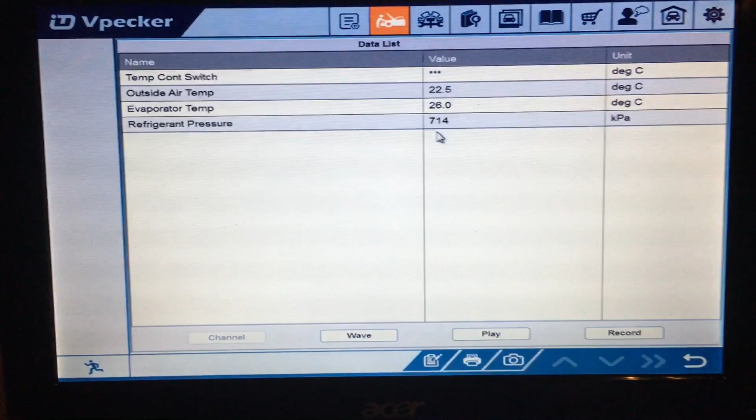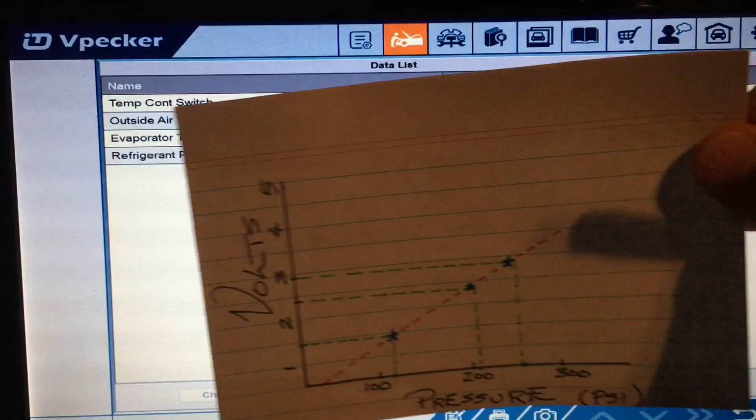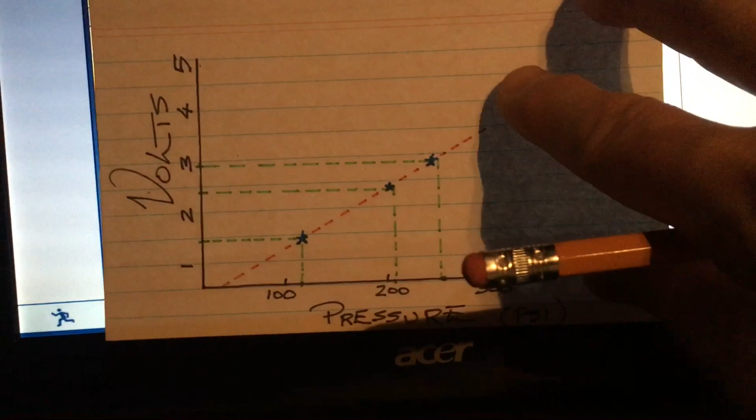To the last air conditioning video I did on the SX4, I was talking about how you could measure the DC voltage from the refrigerant pressure transducer, convert it, and get some idea of the pressure in the system. It didn't come to mind until today that I should have proved this out, that I wasn't just talking rubbish and it did actually make some sense.

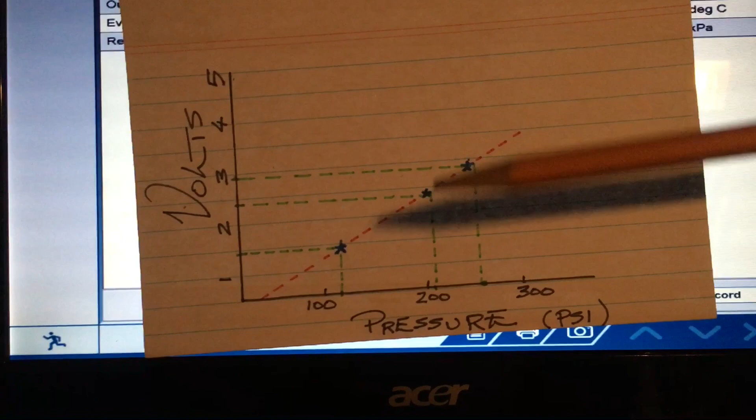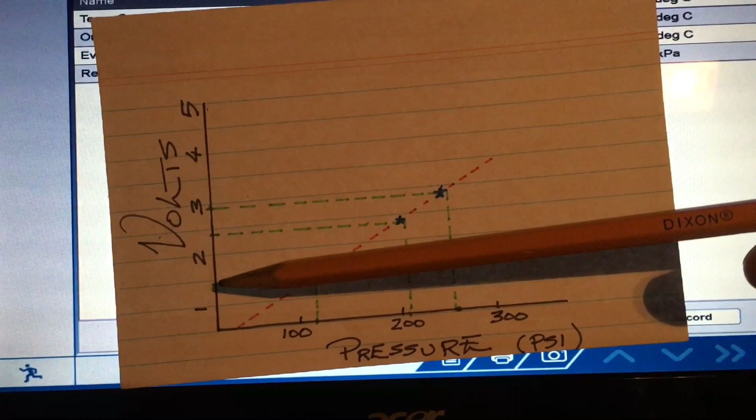So if you recall, we discussed this little card here, but we didn't know the actual pressures, we only had a voltage, which I believe was 1.37 volts. We talked about it being somewhere in and around this range on the graph, so in and around 100 PSI.

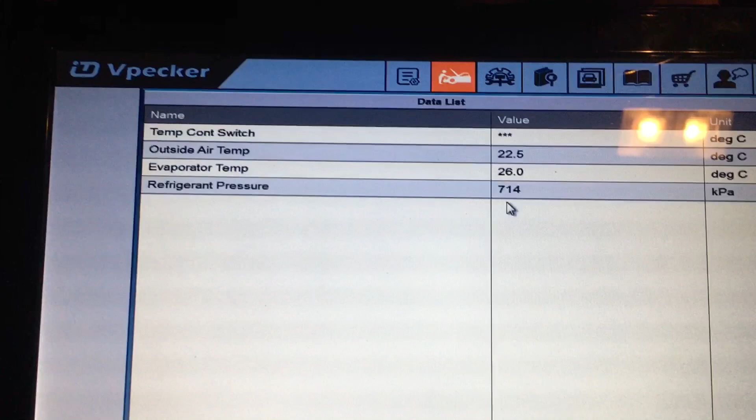Well, I'm in my car now. It's sitting statically, it has not been running, so of course the pressure is balanced on the high and low side. And there's the pressure, 700. I've got the Vpecker hooked up to it, so I'm going through the climate control module, or actually the engine control module that monitors this parameter. But in any case, you can see the pressure, 714 kilopascals.

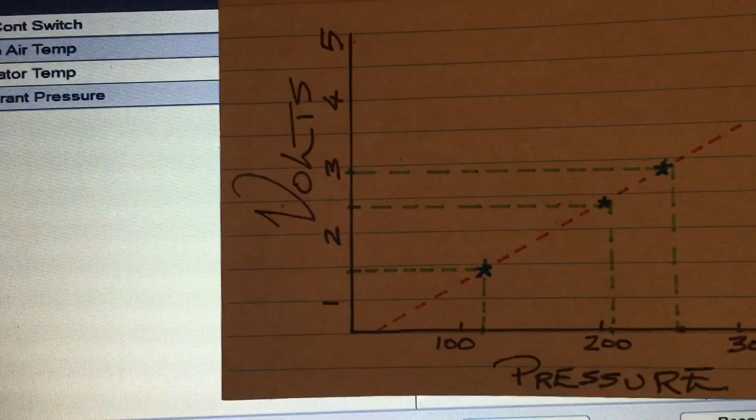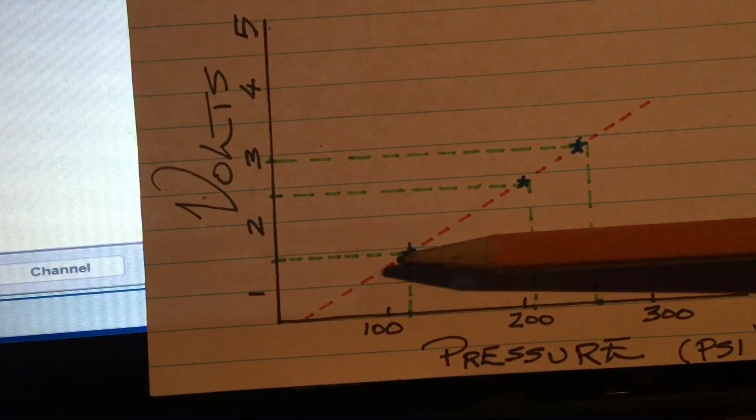Well, I can't show you because I'm using my phone at the moment, but I just googled it. That's 103 psi, pretty damn close to what we actually figured it was, right? So 1.39 volts, let's call it 1.4 volts for simplicity, where it comes across and intersects is pretty damn close to the little graph there.

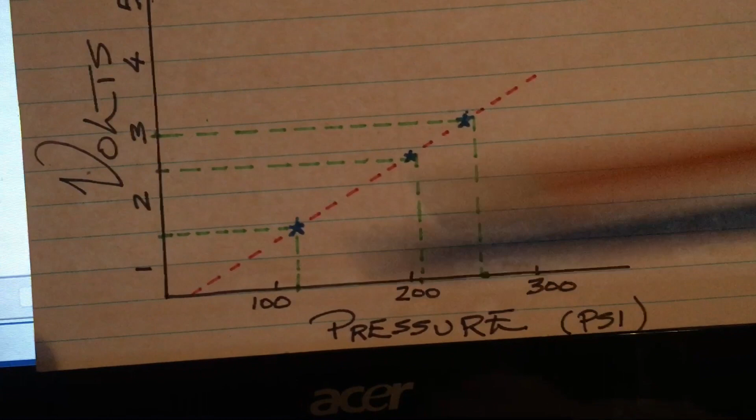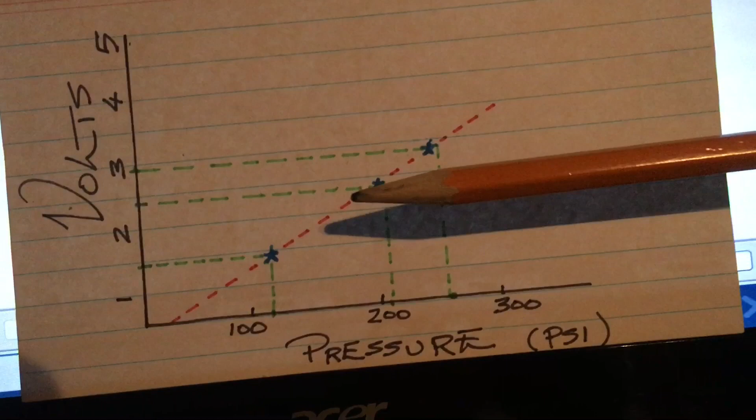So what we'll do is start the vehicle, and if you recall, it went up to very, very close to 2 volts. So there's 2 volts, and it intersects in and around 180 psi-ish, plus or minus a bit. Let's start the vehicle and see what the pressure actually goes to.

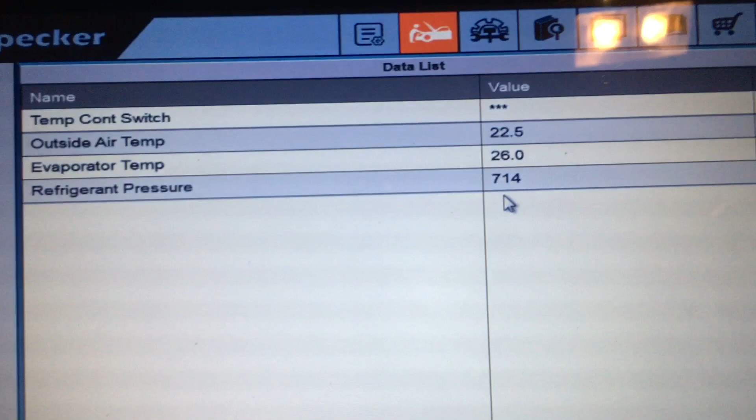Now of course we're going to have to do the conversion again, so I'll interrupt the video momentarily, do the conversion, and restart. Let's take a look, we'll start the car, put the air conditioning on, and the refrigerant pressure should take a jump.

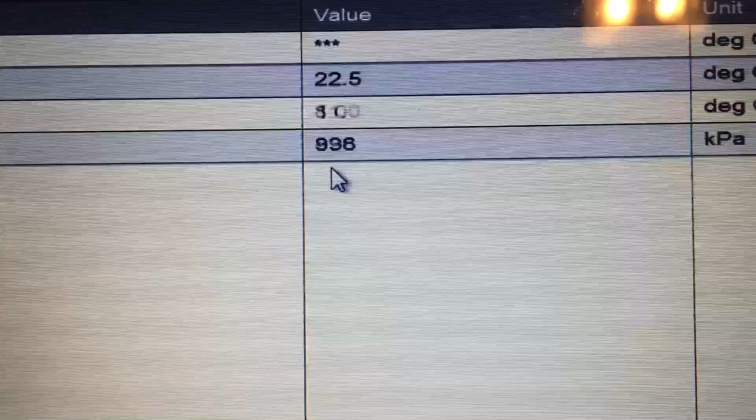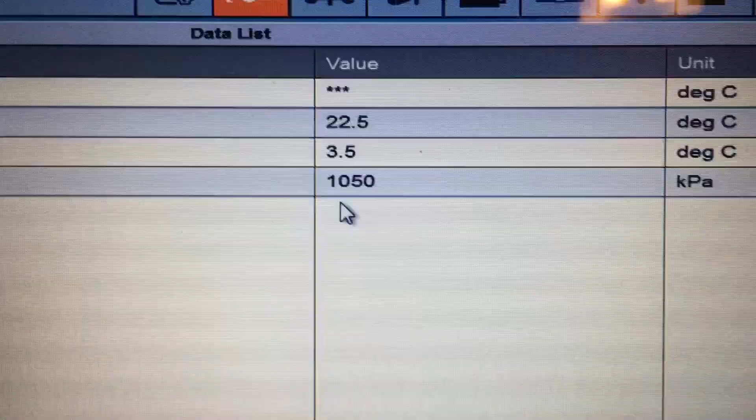Keep in mind our outside temperature, as you can see, 22.5 there, boys. That seems a bit low, it seems a bit warmer than that outside to me, but it's a bit cooler than yesterday. Anyway, it's close enough, within a few degrees. We'll see if we can get the point here. Let's let it run for a couple of minutes and see what our value actually is.

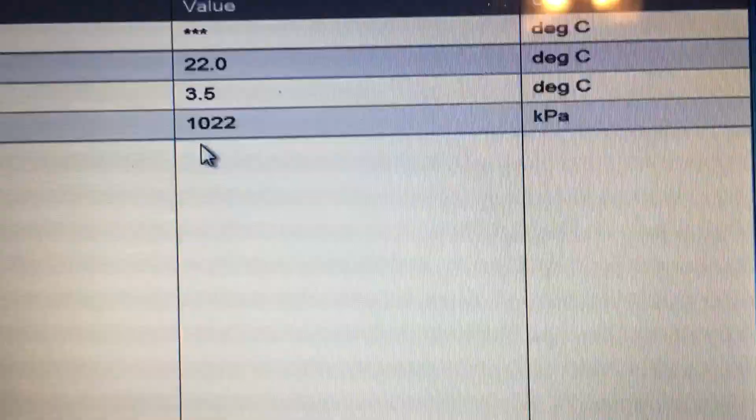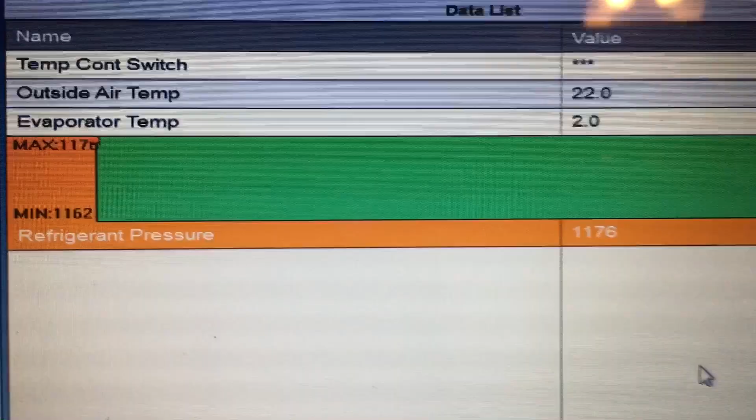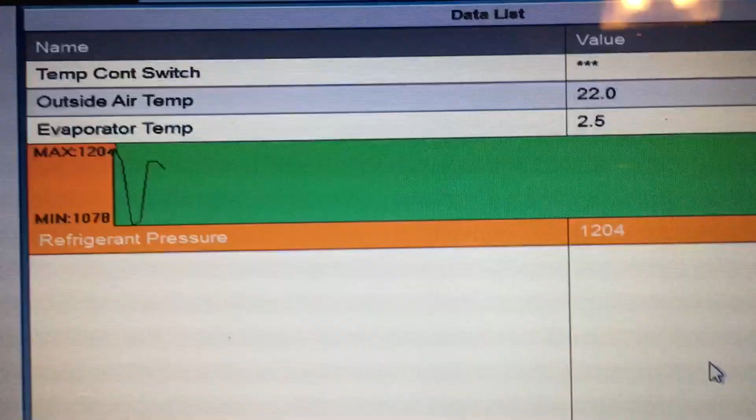You can see our evaporator temp is there as well, boys, so the vehicle is nicely cooling. Okay, so let's call it... in and around, it's pretty close to 1200 kPa. Hey, let's call it 1200 kPa.

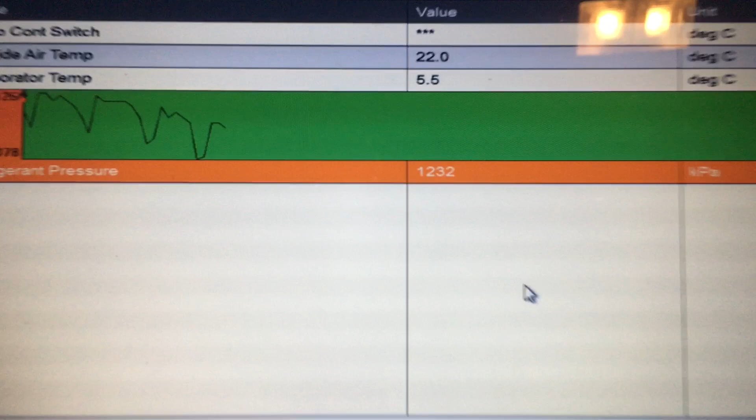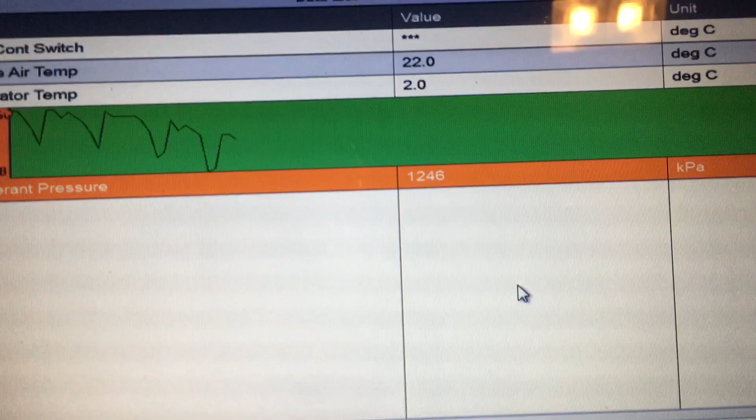Let me do a quick conversion of the units here, see what that translates to in pounds per square inch. Okay, so you can see the figure there, boys, is kind of in and around 1200, right? So I used 1200, I went to the converter, and it is in fact 1200 kilopascals is 174 psi.

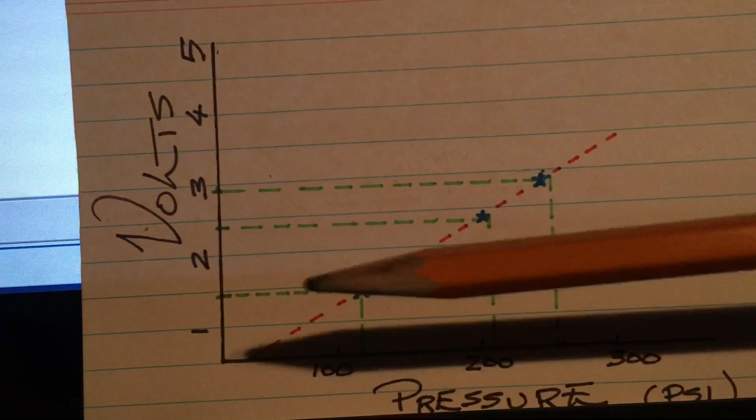So what did we say at the 2 volt mark across? That's pretty damn close. That is pretty damn close, proving the point that you can in fact use your voltmeter to get pretty close to the refrigerant pressure on the high side of the vehicle. So yeah, I just wanted to show you that, boys. I hope that makes some sense.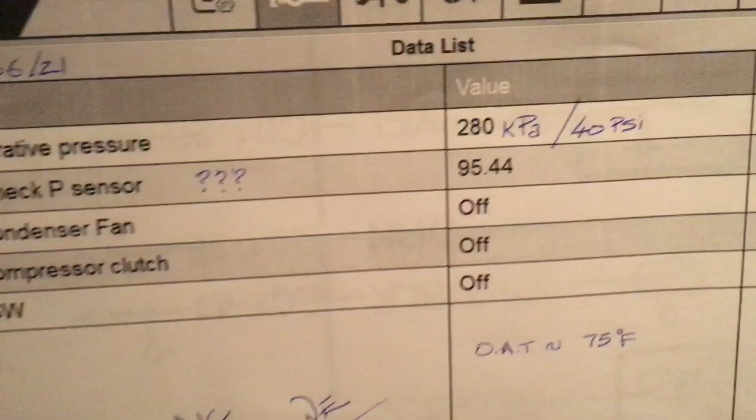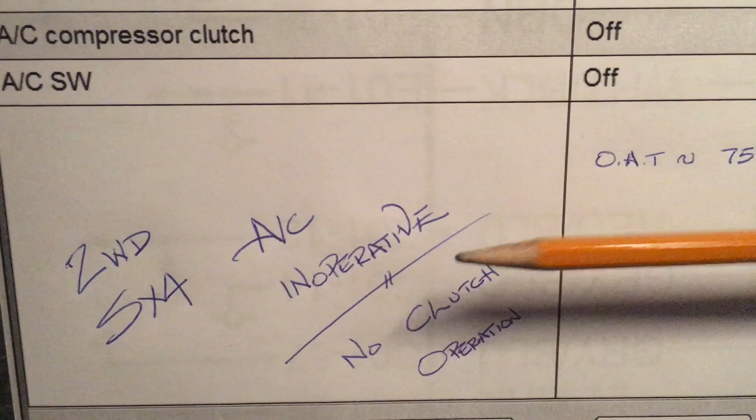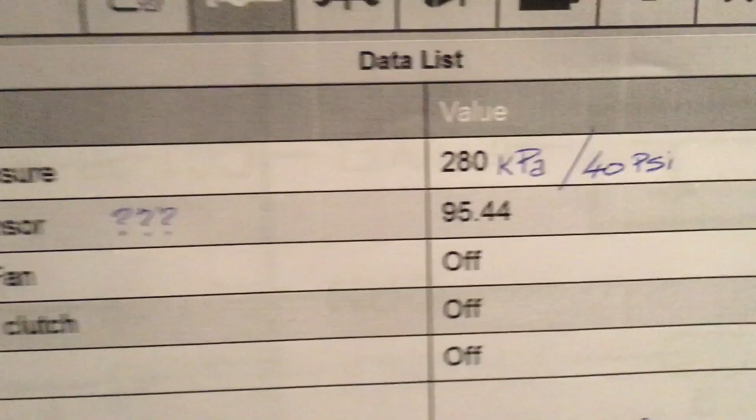Just a closing note here on my other vehicle, I took a snapshot and the balance pressure is only reading 40 psi. So the system is in fact leaking, gone down to the point where I don't have any AC operation at all because the clutch won't engage, and that's why, because there's been a loss of refrigerant pressure. It's not empty, but it's below the threshold now, I do believe. And that's my other car, which is over there in complete darkness, so you cannot see it.

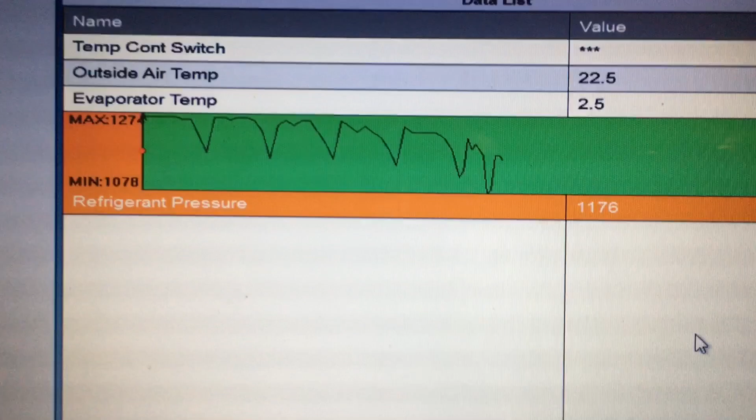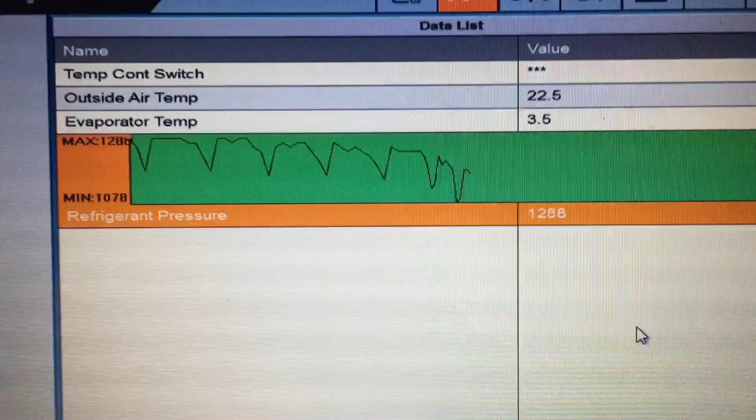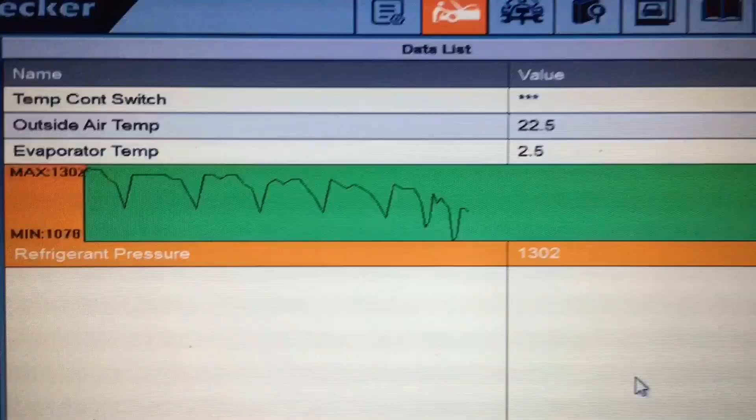Anyway, I thought that was worth flushing out there, boys. So you can see that pressure is actually heading up, and well, it's cycling, of course, as the clutch cycles on the system, right? But yeah, very close to the figures we actually discussed yesterday with respect to converting them manually, just by using a simple graph and a voltmeter. So you don't need the fancy V-Checker or any other scan tools. If you want to go old school, it's hard, it's not a simple way to do it, obviously, but it can be done.